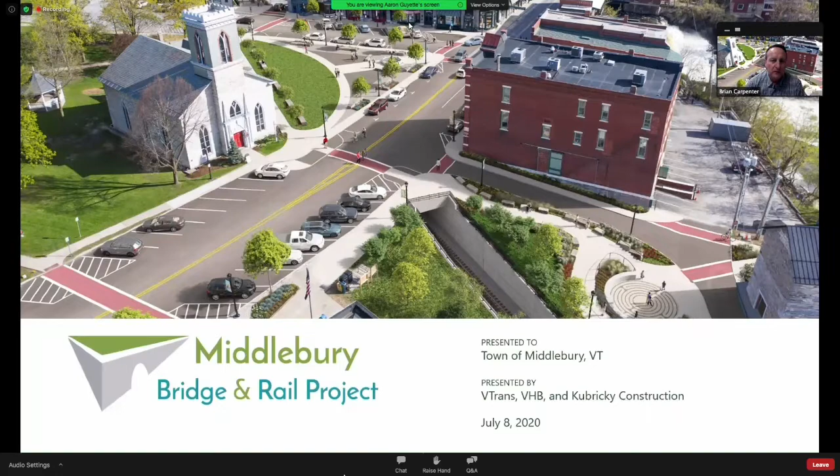I'd like to rehash and draw everybody's attention to the community goals we established at the outset of our project. Number one was to protect the safety of all involved people, property, and the environment, minimizing the project's impact on the vitality of our downtown community, which unfortunately I think the current environment has overshadowed everything we've tried to do up to this point.

Maintain traffic flow and pedestrian access to the maximum extent possible throughout the project. Develop and maintain a credible schedule, which we were right on until COVID shut us down and put us back a little bit. However, we were able to get one of the early projects going during the summer, green-lighted by the governor, so that we could still get it done this year.

And finally, to engage with the local community and facilitate clear communications with all stakeholders. That's why we wanted to have this evening, to make sure everybody has an opportunity to see the plan, ask questions, and make sure we're communicating with you. I think Jim Gish has been doing a wonderful job providing weekly, and certainly this week daily, updates on what's going on. Next slide, please.

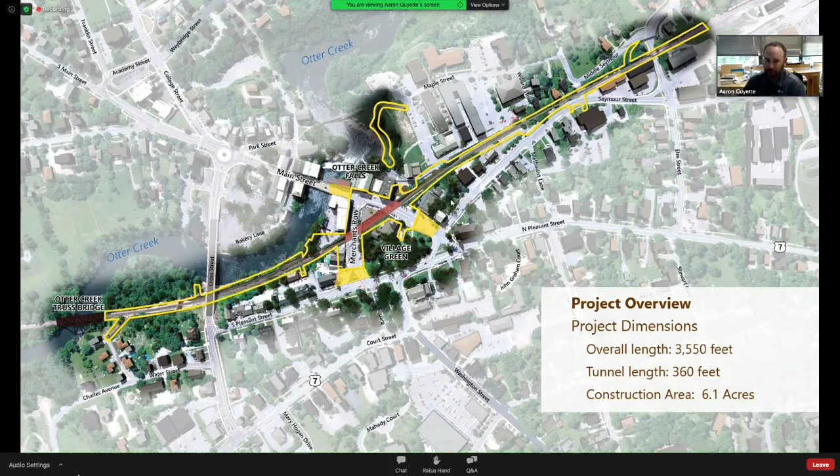And then in the center of town, it spreads out a little bit in the Main Street Merchants Row area. Just to give a frame of reference here for what we're talking about with the tunnel and the retaining walls, which we're calling U-walls.

It's a closed box, precast concrete. And on either end of this are the U-walls, which extend out beyond the tunnel, both to the north and to the south.

They're there to, as we excavate down, retain the fill permanently on either side of it. They'll extend on the northern side just about up to the depot, and on the southern side just past where the pump station is, if you're familiar with that area.

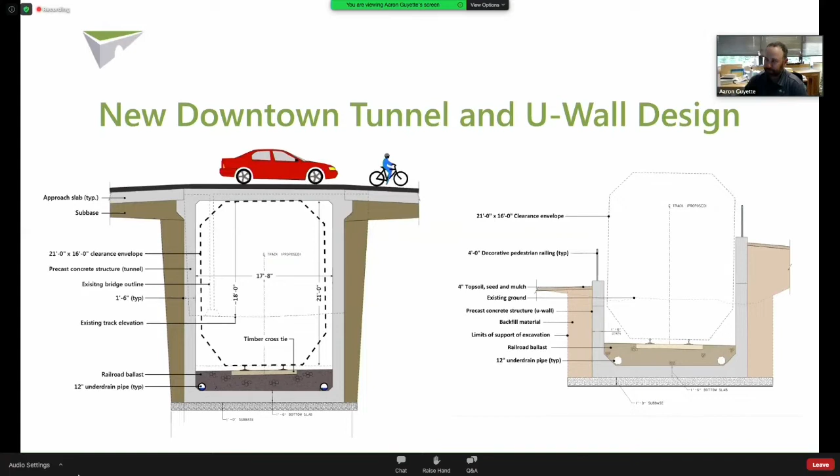So, our current project status. I'm going to turn this over to Jon Griffin, the project manager for VTrans, to talk about the current project status and a little bit of what we've accomplished already. Good evening, everybody. My name is Jonathan Griffin.

I am the project manager for VTrans. So to date, as everybody's familiar, we've already completed Early Work Package 1 in 2017, Early Work Package 2 in 2018, and this project has been ongoing from all of last year, 2019, through this construction season, and will continue a little bit into next construction season as well. So we're in what we call the main project, and right now we're at the point of the closure period, which we'll get into a little bit.

Aaron, can you take me to the next slide, please? So just a quick overview. The 2018 project accomplishments: we've got the temporary access road we needed to the back of the Patel building, and new stormwater and drainage installed for downtown.

That's basically to get it out of the way for this construction season. And undergrounding of all the electrical and telecommunications so that they wouldn't be in the way for the cranes, or anything that went under the railroad tracks had to be lowered so that we could lower the railroad, like Aaron showed in slide 2. So we're moving ahead.

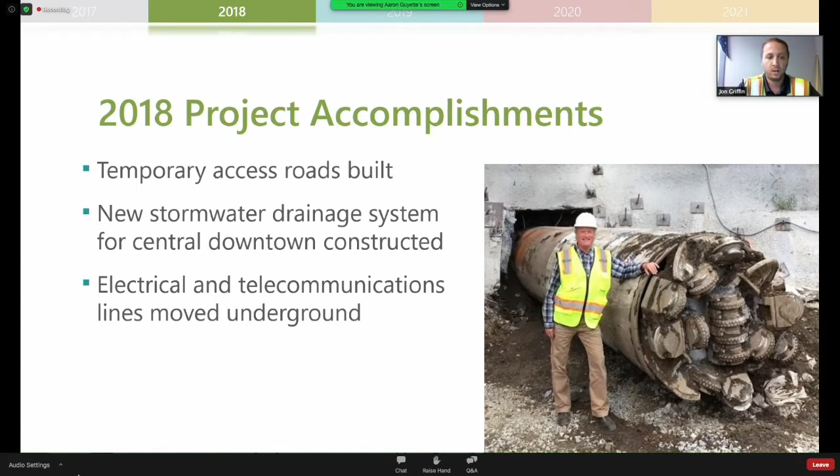It's still down there - we haven't really removed all of it yet. It was just blasted and left in place so that it could be removed this season.

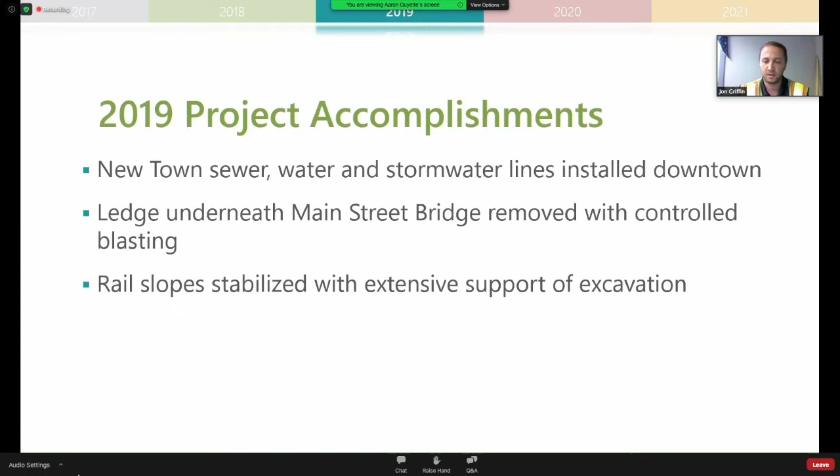In addition to that, you'll hear us use the term support of excavation, or SOE. If you hear somebody say SOE tonight, that's referring to the support of excavation, which includes the mini piles, the timber lagging, and the temporary sheeting - we've got some photos we can demonstrate what that is. There's been extensive support of excavation installed all of last construction season and to date in this construction season.

So just an overview of the utility construction that's taken place to date. You can see highlighted in blue, green, and orange there the water, storm, and sewer work that was done. So there's extensive utility relocations that have already taken place.

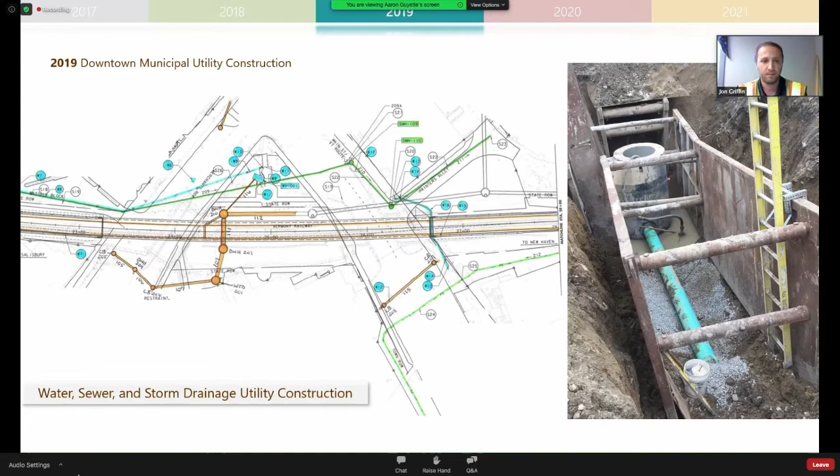So in 2019, as you can see in this photo, this was when the Merchants Row Bridge was still in place. At the bottom of the photo, you can see where the excavator is. There's some timber lagging, and then there's piles with tiebacks in those. That is what we're referring to as support of excavation.

And so we've been installing that - Kubricky's been installing that all of last season and all of this season to date, in preparation for the next 10 weeks.

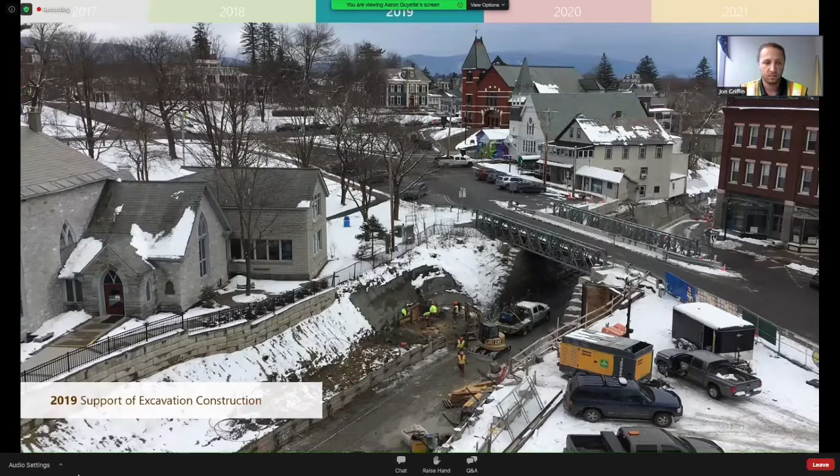On the northern end of the job, ECI has been installing what we call temporary sheeting. This is also a form of support of excavation. On this end of the job, the ledge depths are greater, so we can use the temporary sheets.

They have a toe embedment that allows us to leave these in, excavate down, that retains the fill on either side, and then at the end of construction we'll pull the sheets back out since they're temporary. So they will retain the fill on either side of the excavation while we're doing the 10-week closure.

Good evening. My name is Nathan Speenberg, Senior Construction Manager for Kubricky Construction. Myself and John Whittaker, the project manager for the project, are going to go through the activities we've done over the last few months to prepare for the 10-week shutdown.

And then we're going to discuss in detail what you'll see during the 10-week shutdown, and then summarize what will go on after the shutdown and into next year. You can go to the next slide, Aaron, please.

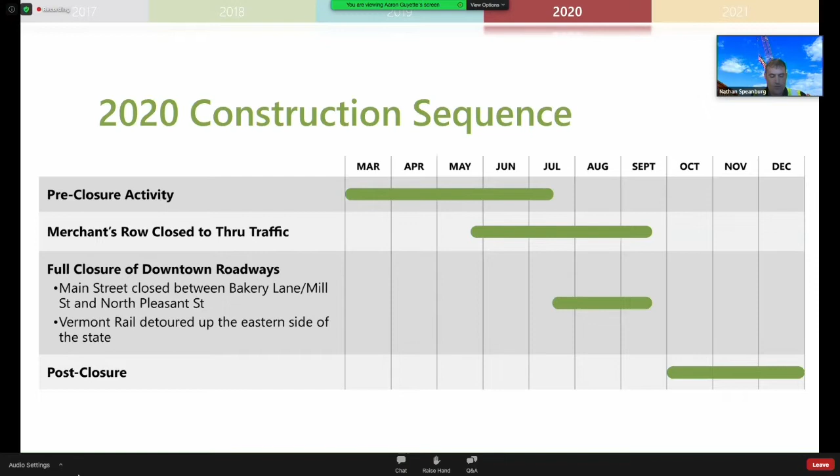So the pre-closure activities, you'll see we have mobilized a lot of different equipment into the site. Primarily, what most have seen is the 3 cranes, 1 300-ton and 2 200-ton cranes at different locations across the job. Those that have come up Vermont 30 into Middlebury have seen that all the precast has been delivered, and we've set up a marshaling yard or a logistics area so that we can pre-stage materials closer to the job site to bring them in when we need them.

We've also continued the excavation and the supportive excavation that Jon Griffin just recently explained.

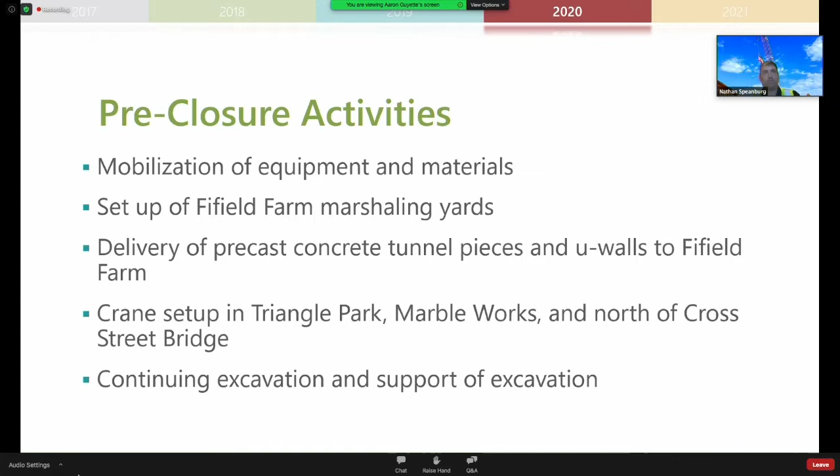As I just talked about, and as Aaron from VHB mentioned, the project location is primarily in the center of Middlebury, from the railroad trestle bridge out to around the old railroad depot, near the rail yard. There's not a lot of space in that area for us to store materials. So what we've highlighted down in Fifield Farm on either side of Vermont 30, the location where we're storing the majority of our materials to be brought in during the project and the 10-week shutdown.

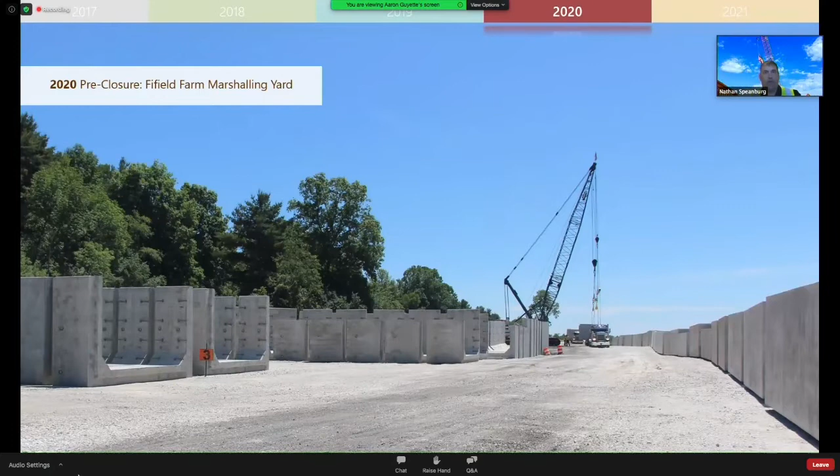Here's a shot that John Whittaker will go through.

So this here is our marshaling yard that both Nate and John and Aaron had spoke about, out on Route 30 in Vermont, right next to the golf course. This is where we are staging all of our precast. To date, all of the precast has been delivered. It is on site and located here, short of what's been brought over to Marble Works, which we'll talk about in a little bit. That's all 422 pieces of precast that were brought up via truck from the precast yard out in Schuylerville, New York.

So the next thing that occurred that I'm sure many of you have noticed now is the assembly of the cranes. This photo here shows the setup of the crane mats. These crane mats are put in place to basically help spread the loads of the cranes and help create a safe picking location for those.

You will see during the actual erection of the precast 5 cranes on site, 3 of which you see up in the air now, 1 now on Route 30 which is at our precast yard, and then we'll have an additional truck crane that'll be on site, set up on the east side of the cut of Merchants Row and Main Street, and also out on Seymour Street at one point.

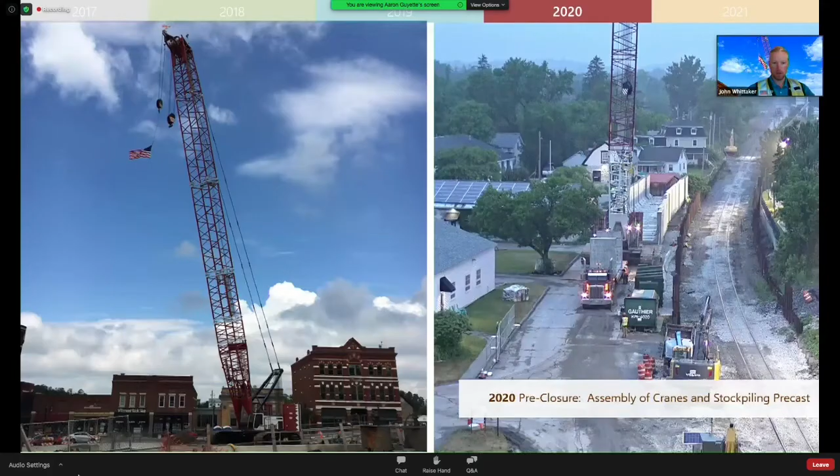So this here is some photos of the cranes that were set up. The one on the left is our 300-ton crane, the largest crane that we have on site. That'll be picking the precast sections that create the tunnel that Aaron talked about in the beginning. That was performed having to shut down Main Street, which I'm sure many of you had come out to see, and has been sitting there since.

So the one on the right is showing the 200-ton crane that's down behind Marble Works. You'll see in the background some of the precast actually pre-staged. So what we did was brought that precast out there and put that in place in preparation to be set into the tunnel cut to help eliminate some of the congestion in trucking when the actual shutdown occurs.

So the 2020 main roadway closure dates - I think this is why most people have probably attended, just to learn a little bit more about this. So as you know, Merchants Row has already been removed. It came out on May 28th, and that will be out until September 21st.

Main Street is due to be taken out of service on Monday morning, July 13th, 7 a.m., and be out of service until September 21st. September 21st is the 10-week duration from July 13th. The Main Street footbridge will come out of service as well on July 13th on Monday, and it will not go back in because it'll be replaced by the tunnel, so there won't be a need for it. And then Printer's Alley will also be unavailable to pedestrians for that duration as well, starting on Monday.

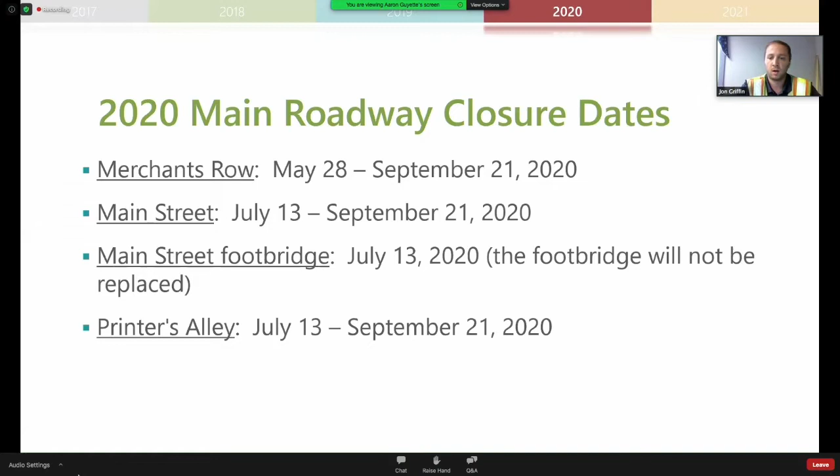So the closure initiation: Main Street will be closed at Bakery Lane and Mill Street, and also at North Pleasant Street. Crosstown traffic will be detoured through Cross Street. So if you used to go down Main Street, now you'll be using the Cross Street Bridge to get over the railroad. You'll no longer be able to go across Main Street.

One thing I'd like to talk to you guys about is that we have partnered to provide the Shuttlebury, which will be a continuous loop downtown for pedestrians, and that'll begin on Monday.

Jim, if you wouldn't mind jumping on here to talk a little bit about some of the efforts Neighbors Together has done with wayfinding, I think it would be most appropriate for the community to hear from you.

Sure, thanks John. Hey folks, Jim Gish, your community liaison here. We have a lot of road signs in Middlebury. There are 4 state highways that all converge on our town. Many of those road signs will be covered up and replaced with a new set of detour signs that the state and Kubricky have worked to put up to direct traffic around the detour.

But Neighbors Together and the Better Middlebury Partnership, many of you will be familiar with how important these two groups have been to this project, got together and wanted to create something uniquely Middlebury with signage, something that would help not just motorists get around town, but also those on the sidewalks who needed to get between Marble Works and Main Street, from the post office to the National Bank, just getting around town.

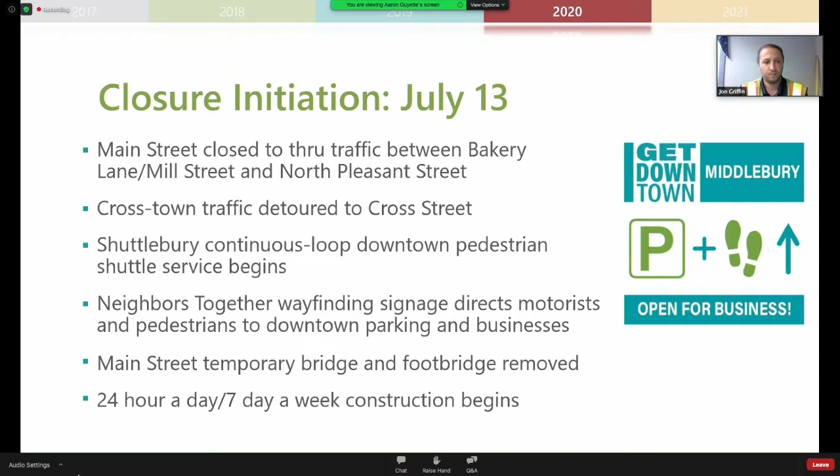So thanks, John and Jim. Again, this is Nathan from Kubricky. John Whittaker and I are going to walk through a little more detail on what's going to happen during the 10-week closure. We've broken it down into 3 phases.

Phase 1 roughly runs from about July 13th to July 23rd. The bottom line of that phase is to remove the old rail, to excavate down to the new elevation as Aaron Guyette had described. We're going to be moving the excavation soils from either end, from Middlebury, either directly from around the depot or out Water Street.

Out to Fifield Farm, where we're going to store the majority of the materials or send them to Heffernan's pit if they aren't needed for reuse. We have to continue to do supportive excavation until we get to the ultimate depth of the tunnel to maintain a safe excavation for our workers. And then we do have some rock that needs to be removed that's in the way of the current design. In the first 6 days of phase 1, we'll conduct blasting operations like we did last fall, during daylight hours only.

One of the last things we need to do during this phase is to also connect the stormwater that will eventually run from Triangle Park to the stormwater and tunneled areas that we performed in 2018, so that eventually all the stormwater from that Triangle Park area can make it out to Otter Creek properly.

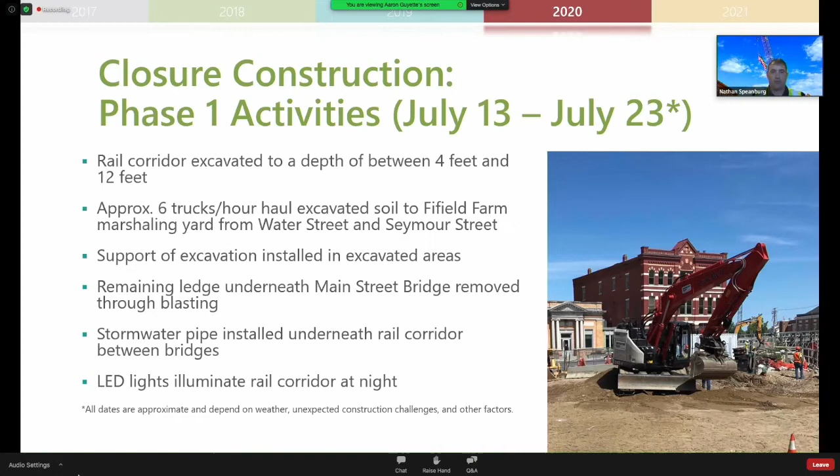So phase 2 is really built directly around the precast installation. You'll see right around this time that we will start hauling the pieces of precast into town, and you'll start to see the crane swinging. So the downtown tunnel, U-walls, north, south, all that stuff's going to be coming in different ways.

We're going to have 6 flatbed trailers bringing these in. The majority of the pieces are going to come up Route 30, directly into downtown Middlebury, around the traffic circle, and then backed up Main Street to Triangle Park. There were a few people, I think, that came out and saw that mock-up, caught it just in time.

Basically everything in the middle for the tunnel area, as well as a large majority of the pieces heading south. There will be also a fairly decent amount of material going out across Cross Street Bridge and coming around Seymour Street and down into Marble Works in order to supply the other 200-ton crane. You saw that we staged some of the materials there, but that's only 31 of the multiple pieces that crane is going to set. And then finally wrapping up with a 275-ton crane out in the middle of Seymour Street.

That'll be a very short duration, a couple days. You'll see some alternating traffic, single lane closures, and then at one point there will be a full closure of Seymour Street as far as through traffic goes. You'll still be able to get to Fire and Ice and the other businesses there, but you just will not be able to pass through.

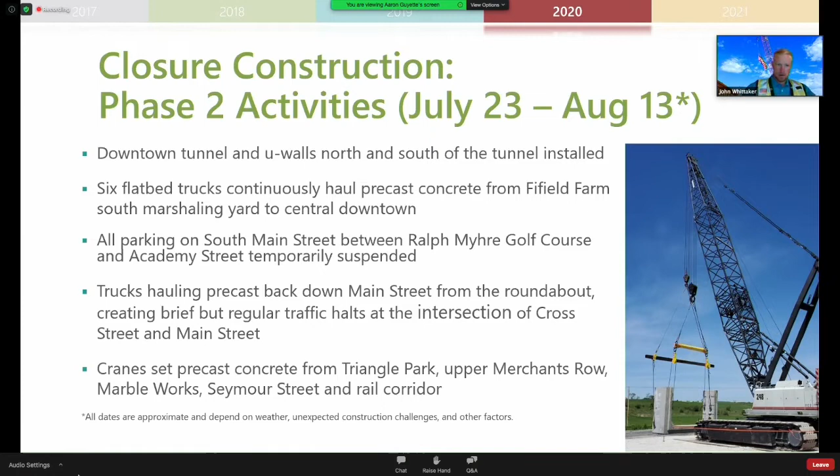So as far as phase 3 goes, after the precast has been set, we'll start coming behind it and backfilling, even prior to this phase. But the biggest thing here is just backfilling the tunnels and the U-walls. On the other side of Route 30, near our precast yard, you'll see some large piles of material. That's where the majority of the material is going to come from, directly from there with dump trucks down into the cut, either via Water Street or via Marble Works. That's how we're going to help backfill both ends.

And then the rest of it's going to be brought in directly to Triangle Park and dumped in at that point. So you'll see us start to bring that up. Once that backfill is complete, that allows us to begin doing the roadways, the sidewalks, some of the minor hardscaping, and then also rebuilding the rail corridor itself, as far as the rail and everything else down inside of it.

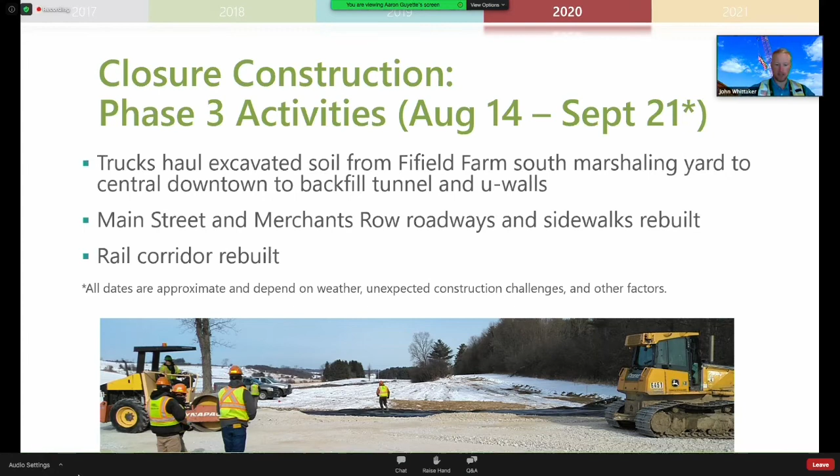The final thing you may see the start of will be the concrete cap walls. You'll see us pouring concrete above the precast on the north and south ends to create a nice final slope finish.

So upon the completion of the 10-week shutdown, you'll have both Main Street and Merchants Row back open to through traffic.

Merchants Row will remain one way up the hill, as we still will have work to do to finish Triangle Park with landscaping, plantings, sidewalks, etc.

Downtown parking on Main Street in front of Battelle Block will be restored. The Battelle Block access drive will be opened back up to through traffic rather than the access road that those tenants have been using recently.

And then Printers Alley will be reopened back to pedestrians, but not yet to motorists. That's due to the fact there's still some nice landscaping work that needs to be completed, as you'll see later in this presentation. Triangle Park will still be fenced off to also finish the nice landscaping that you'll see later on.

So some community challenges, things you guys should anticipate as part of the project: traffic congestion at the cross street intersection with Court Square. Just without Main Street, we're adding a lot more capacity to that intersection. So if you're going to commute during peak hours, definitely anticipate congestion, be prepared for it.

Another major challenge is going to be that there's no direct pedestrian access across the rail corridor. So in order to get across, you basically have to either go across the cross street bridge or down to Seymour and underneath the railroad overpass. There's going to be limited access directly across the rail corridor.

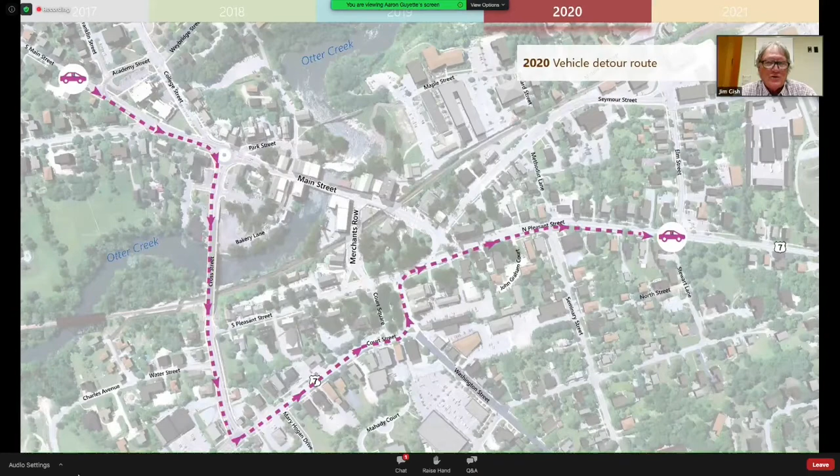And again, we talked about pedestrian mobility here. Those of you looking to get in shape will have an opportunity to do so by walking our detours and watching the construction while you're doing so.

And as John mentioned earlier, if the day's hot, or you're in a hurry, or you're just not up for the walk, the Shuttlebury will be continuously looping around downtown every 15 minutes. It's a great opportunity to take advantage of the service V-Trans is providing. So let's say you're in front of the post office — you can pick it up right there and ride it back into the Marble Works if you park there. I'd encourage you to get to know that service and take advantage of it during these 10 weeks.

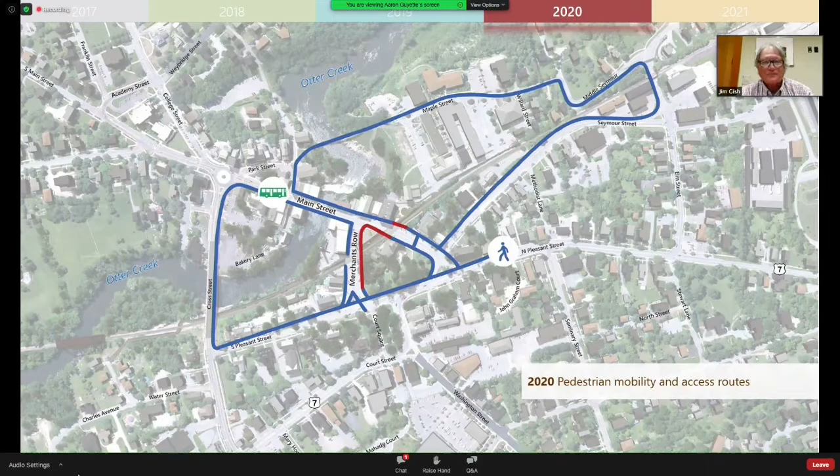What you're looking at here is the Get Downtown mobility map. This came out of the mobility committee that John mentioned before. A number of us worked on creating this map, which may be a little hard to see here, but what you're looking at is a map that shows the Shuttlebury route, what our walking routes will be, where roads are closed, where they're open, basically how to get around town.

That'll be great for us who live locally who have to get familiar with this. It'll also be really important as visitors start coming back into Vermont and into Middlebury, so they'll know their way around. These maps will be posted in large size at various locations around town.

I think we have 9 total locations, chosen strategically, so whatever part of town you're in, there'll be a large size version of this map. We also printed 5,000 copies to hand out to local stores, the post office, the inns and hotels in town. We're going to blanket the area with these, as well as make them available to you digitally if you want to print them out yourself. So this is how we're going to get around downtown during this period. A very useful piece of work here.

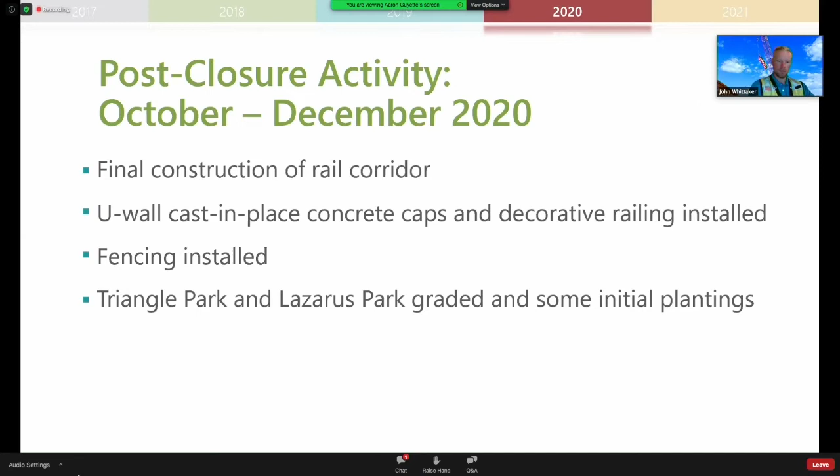As for the post-closure impacts, there will still be some intermittent short-term lane closures on Main Street Merchants Row. That's to facilitate deliveries and the installation of the final grading and or landscaping. You'll see the pavers and the curb, as well as the reuse of some of the ashlar blocks that were moved from the foundation, in the renderings VHB will describe shortly. Triangle Park, as I said earlier, will be fenced off still so that we can install all that landscaping between the church and Main Street Merchants Row.

And then there'll be intermittent sidewalk closures, primarily along paralleling Triangle Park within our fence line. But there will be some occasional sidewalk detours so that we can finish up some of the landscaping within the roadways and some of the tree plantings within the sidewalk areas.

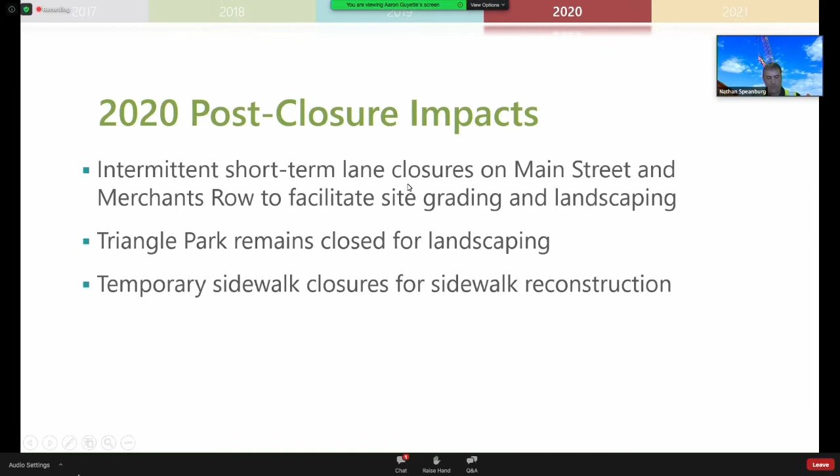Finally, as we move into 2021, the hope is a lot of this will be final plantings based on the planting season of different plant species that have been selected for the landscaping. We have to plant some in the fall and some in the spring. There'll be a final course of paving, final striping, final array of traffic signage to its finished state, and then cleaning up, removing all of our equipment, and getting out of Middlebury so that it is back to the project that everyone has been anxiously awaiting to complete.

For 2021, it's the intent to minimize as much work as possible, trying to get as much done this fall as possible, weather dependent. The majority of that is so that we can leave you a nice finished landscaping product. We won't install pavers or plants that may be damaged through the winter, and we'll focus on that in the spring if a better result comes because of it.

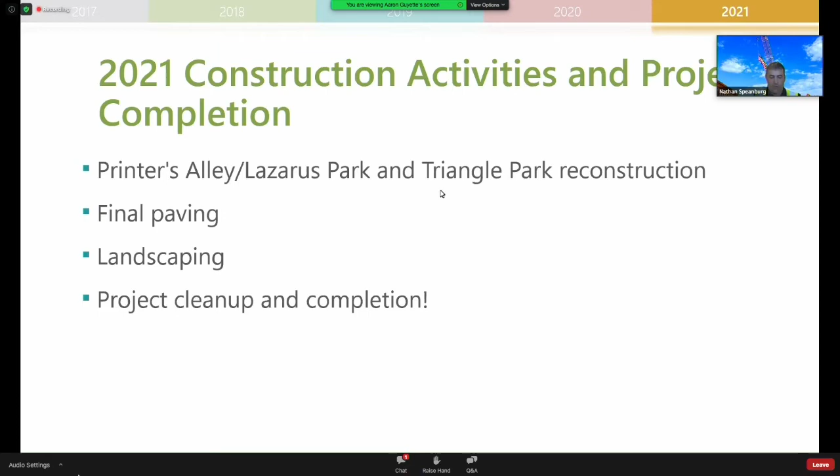Other things in 2021: you may see us cleaning up different staging areas. Those of you who know we have a staging area out on Exchange Street, we will remove all of our materials and start to clean up some of the remnants of equipment that's been there since 2017 when the bridges were removed. We'll also do a walk-over with VTrans to make sure everything is good to call the project a success. With that, I'll hand it over to VHB to describe the renderings and the look of the project at completion.

Before we jump into that, would we be able to answer one question? We had a participant ask, how do I access the Frog Hollow parking lot, and can I go down Main Street to get to Mill Street?

Sure, why don't I take that. Thank you for that question. Main Street will be closed on the other side of Bakery Lane and Mill Street, so you'll be able to get to Frog Hollow by coming up Main Street from the roundabout and turning left just as you normally would down to Frog Hollow. You'll be able to exit out the other side onto Waybridge Street — there will be no impact on that roadway.

Great, thanks Jim. So there's just a few slides here — these are photorealistic renderings developed based on the design, showing the intent for how the project area looks after completion. I won't go into too much detail; these are all posted on the project website if you want to look at them in more detail. Just pointing out a couple things: the tunnel is in place in this photo, roadways are reopened, and the area that's been an open cut for the last 100 years or so is covered over, becoming a park and green space on top.

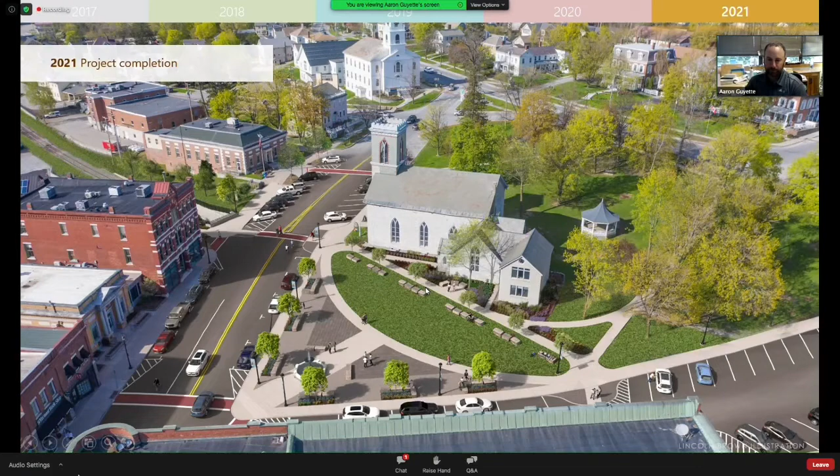Just another photo rendering looking towards the bank building from Merchants Row. Point out the reuse of the ashlar blocks as seating in the park area — those are the blocks that previously lined the railroad. You can still see some of them on the Main Street side. On the Merchants Row side, most of those ashlar blocks have been removed at this point, and the intent is to reincorporate those into the project as a historic element.

Another shot of the park area looking from Main Street. This is the Printer's Alley area where there will be a small park as you walk down towards the Marble Works. And this is the bottom of that small park area with a labyrinth — an interesting element to include there.

So with that, I'm going to turn it over to Britta Tonn. Britta's a historic preservationist with VHB, and she's going to talk a little bit about a project that's part of this Middlebury Bridge and Rail project. We explained this to the select board at a regular meeting just a couple weeks ago — this comes about as part of the NEPA process and Section 106 historic review, because we do have impacts to historic resources in downtown, including the old bridges, which were considered historic. There is some mitigation required, and part of that mitigation is to update the nomination for the Middlebury Village Historic District with the National Register of Historic Places. So with that, I'll turn it over to Britta, and then Devin Coleman as well will be speaking. Devin's with the State Historic Preservation Office.

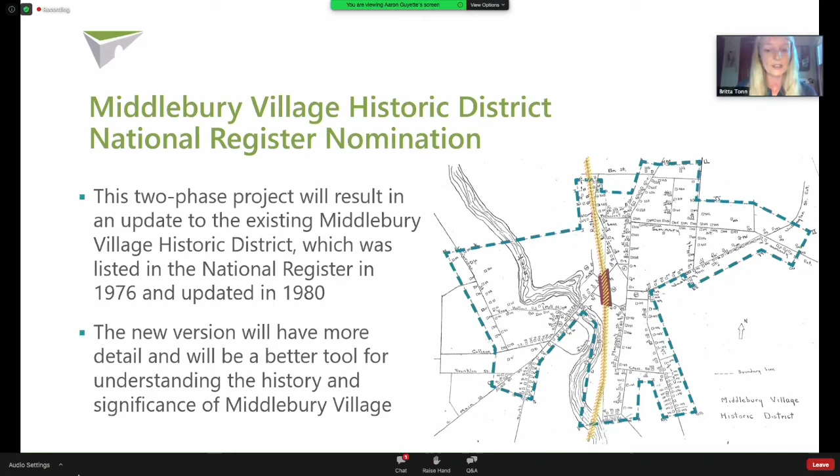This is a project that will be completed in 2 phases. Phase 1, which we are just beginning now, is a survey of the village to record information about the history and architecture of each historic resource within the district and in neighborhoods surrounding the existing district. This survey is being completed according to the Vermont Division for Historic Preservation Guidance for Historic District Nominations. The purpose is to inform the National Register nomination by recording relevant information about the history and architecture of buildings.

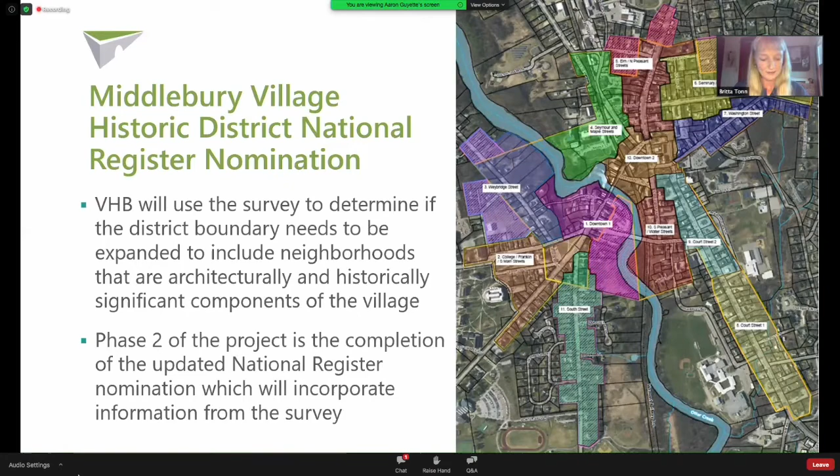Thank you, Britta. Thanks to everyone for joining us. This is a great opportunity to update this nomination, which is long overdue. As Britta noted, it was originally completed in the 1970s, and things have changed in Middlebury since then. Buildings have been built, buildings have been removed, some buildings have been physically relocated, so this is really a great project.

In terms of what the National Register of Historic Places is, it is a program run by the National Park Service, and it's the official list of the nation's historic places that are worthy of preservation. So it's part of having a consistent process for researching and documenting our nation's heritage, and that information can then help inform efforts to preserve and protect those resources.

And the program is administered by the National Park Service through the Vermont Division for Historic Preservation at the state level. And then we coordinate the process with local property owners and community members, as is the case here in Middlebury for this project.

Since the first National Register listings in Vermont in 1966, we've listed more than 12,000 buildings, sites, structures, objects, and districts in Vermont. So this is a program that is in place throughout the entire state, communities large and small.